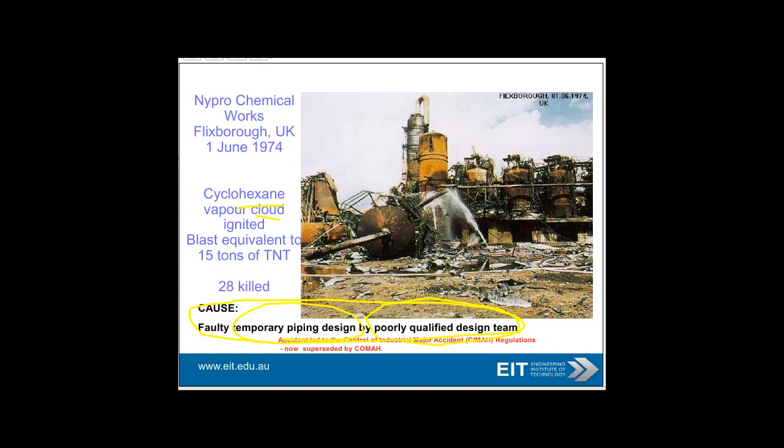But obviously, at the end of the day, it's up to the designers of the entire system to make sure that you don't get put into this position in the first place. So temporary piping design is a big issue. Having a control system to pick up the problem is really a little bit later after the event, so it's not a preferable scenario, but obviously it does give you that safety protection.

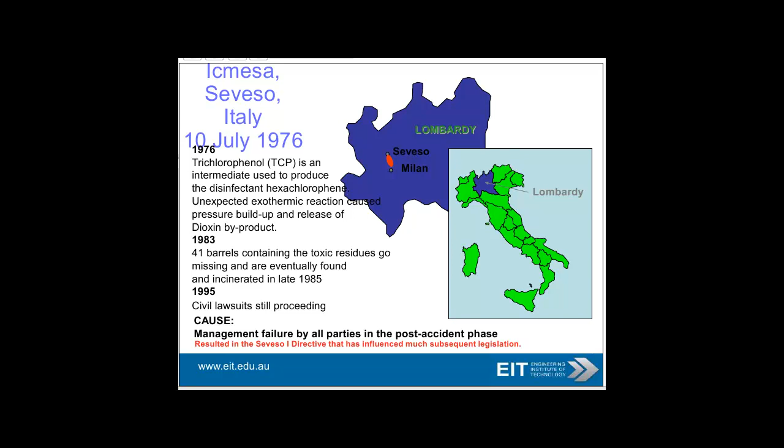Another example is ICMESA, Seveso, Italy, 1976. Again, TCP, disinfectant. Exothermic reaction caused pressure buildup and release of dioxin byproducts. Pretty horrendous problem there. So again, to be avoided, I think TCP is actually carcinogenic.

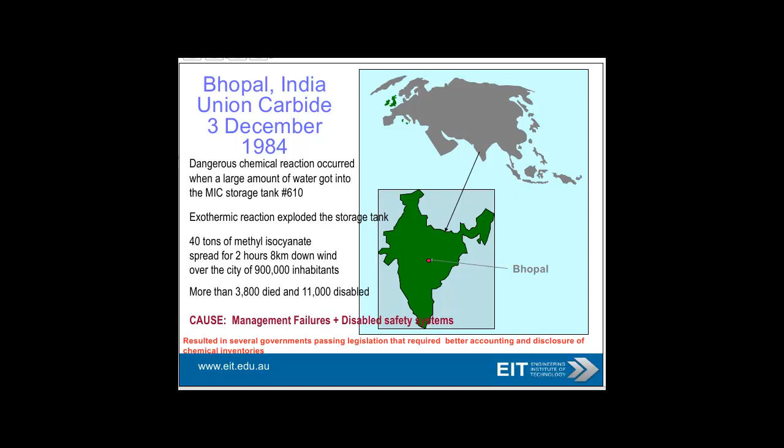Another example is Bhopal, which is pretty horrendous, 4,000 died. A large amount of water got into a storage tank, causing an exothermic reaction that exploded the storage tank. So basically you had methyl isocyanate released into a very poor town of 900,000 inhabitants. Absolutely horrendous situation. I reckon the CEO of Union Carbide was so traumatized, he was a very successful individual, but after this he basically semi-retired. Not that it helped the 4,000 that were killed in India.

Milford Haven, UK, Texaco refinery. Funny enough, soon after we ran a course there actually. Horrendous alarm overloads, and again, a pretty bad explosion.

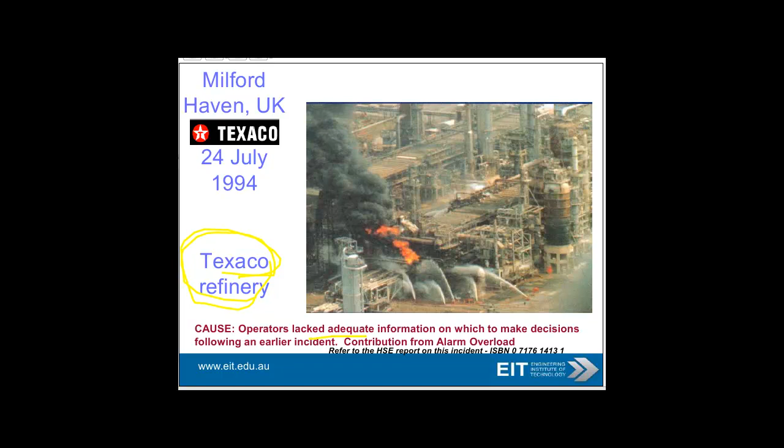Sonat Exploration Company. No plant operating procedures, inadequate vessel relief devices, and absence of any process hazard analysis. So overpressurization, 4 killed.

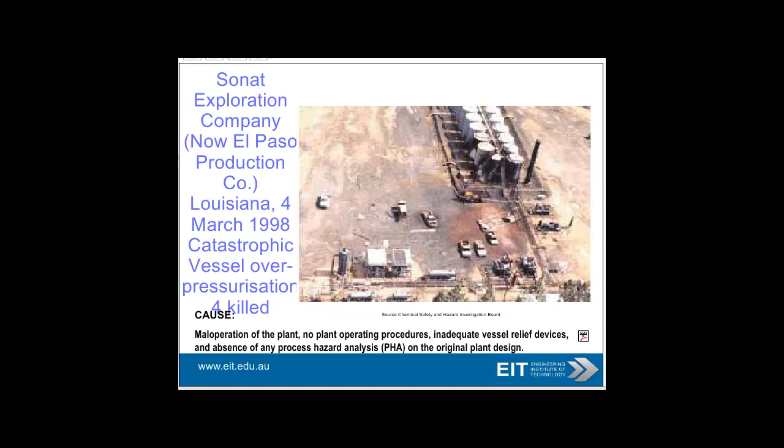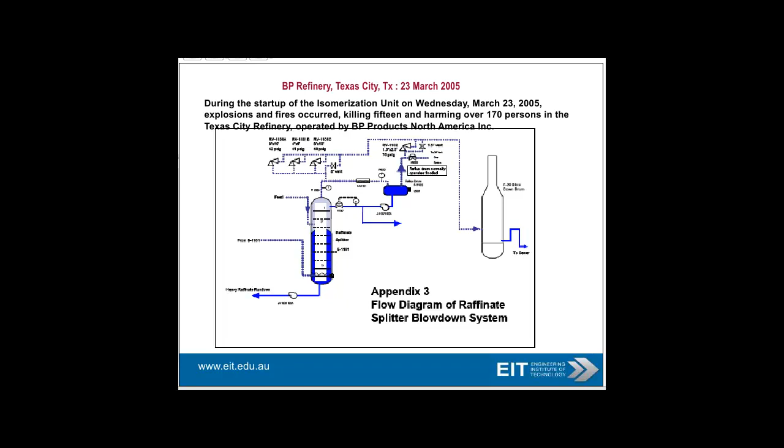Another one is BP Refinery, another famous one, 23rd of March 2005. Again, pretty bad explosion there. And obviously the question is, can it happen to us? Well, it certainly can if we're not going to do something about it.

So just here are a few basics of the system, whether it's an emergency shutdown system or safety instrumented system, whatever you want to call it. First of all, we use the abbreviation SIS, Safety Instrumented System, often referred to as a shutdown system, instrumented protection system. Everyone has their own little acronyms, as we all do.

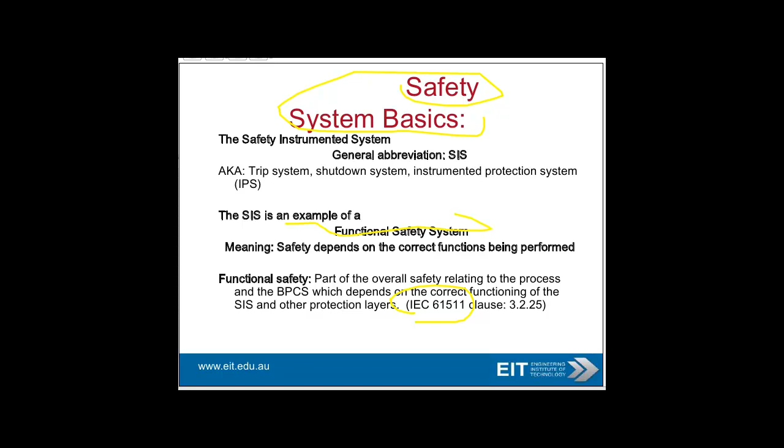And this is an example of a functional safety system. Again, I emphasize this fixes or tries to prevent damage or hazard after the event. Obviously, the entire holistic design needs to be done properly from the beginning. So this is related to the 61511 standard and the 61508 standard.

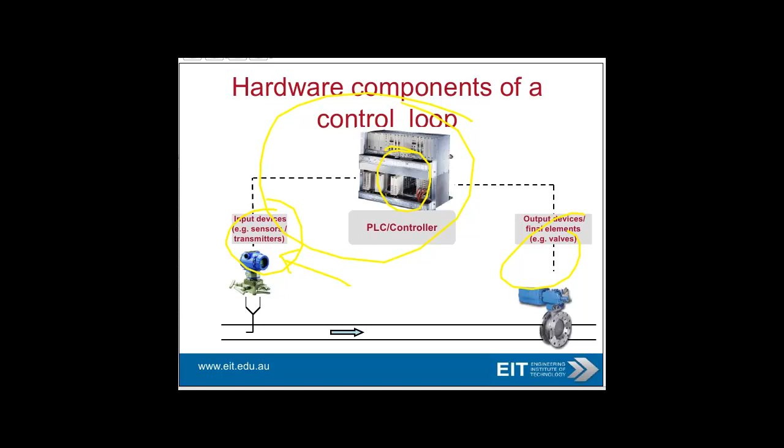So really in a typical control loop, which we're all familiar with, you've got a PID control loop. On your left, you've got the good old flow meter, and on the right, you've got your control valve. And in the middle, you've got your PLC controller, DCS system, or standalone loop controller.

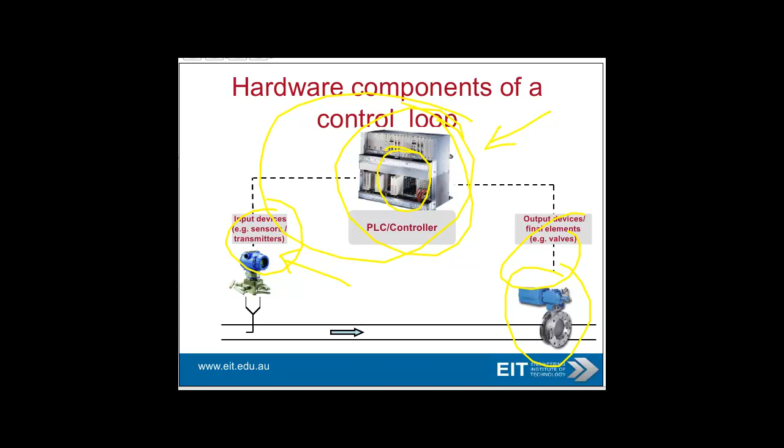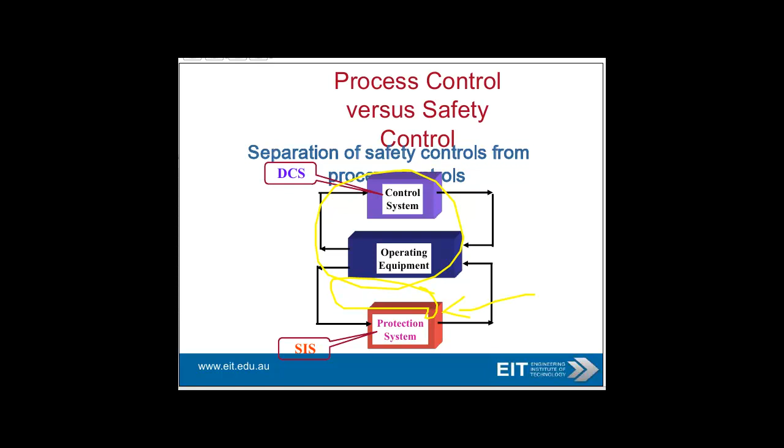As you would see from this, there's nothing really to pick up a potential hazard. Obviously you're designing this so you don't have a hazard, an overflow or over level of the tank. So the idea is you put in a protection system running in parallel, which picks up the potential problems and corrects for any problems independently of your control system. The control system will also act properly, but this acts as a sort of big brother pickup of problems.

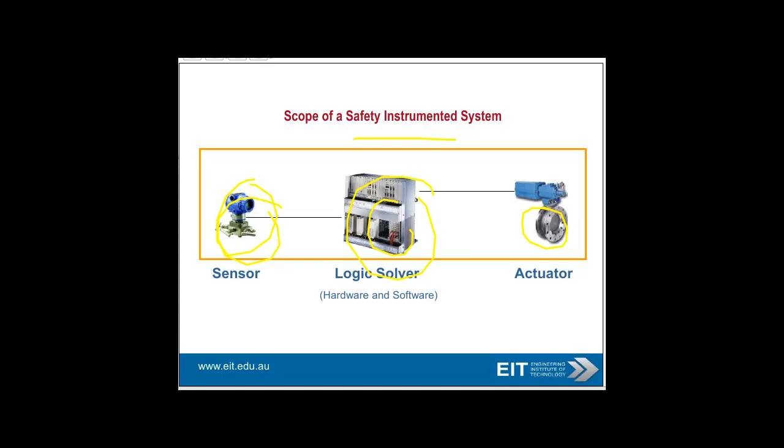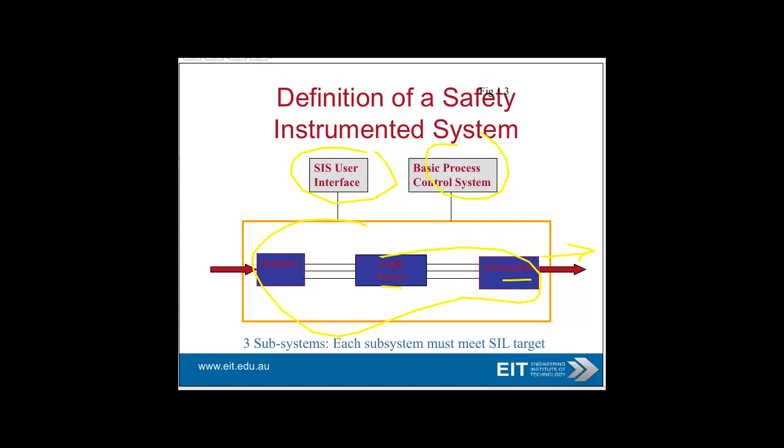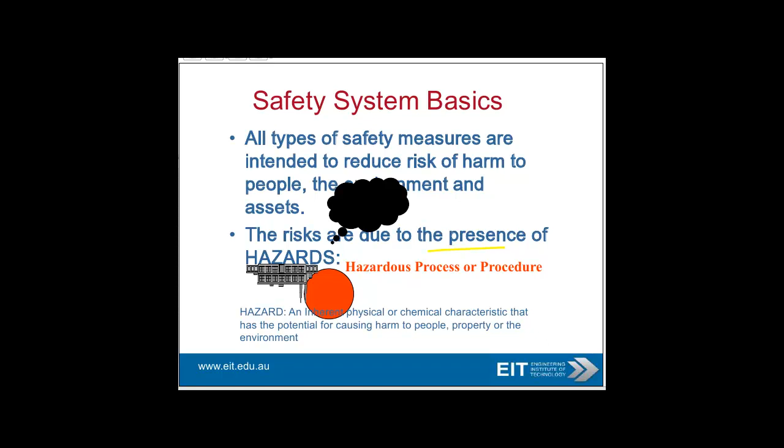Just a few issues on the system basics. Obviously the risks are due to the presence of a hazardous process or procedure. And a hazard is defined as an inherent physical or chemical characteristic as a potential for causing harm to people, property, or the environment. So that's what we've got to assess.

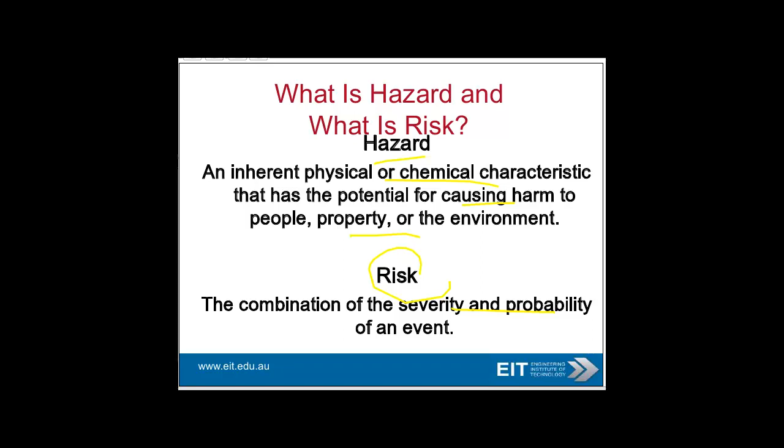So a hazard really is what is the potential problem, and then there's an issue called risk. When you have the severity, which is how bad is it, and the probability or frequency of the event, multiply those together, you get a risk. So obviously we want to try and keep that as low as possible.

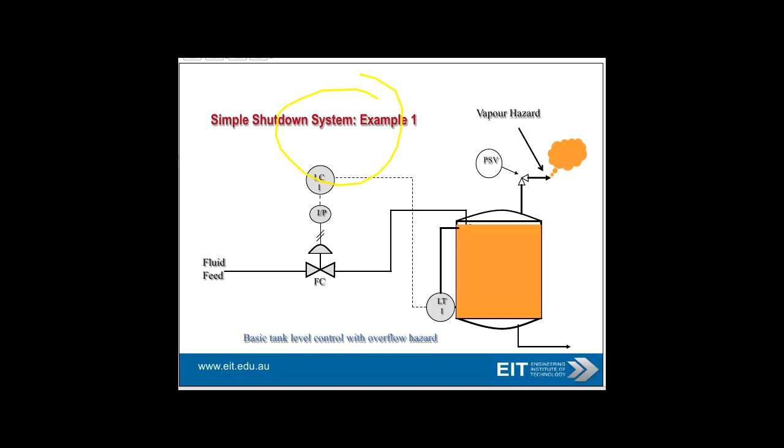So here's a simple shutdown system. Don't worry too much about that. Vapor hazard. Obviously we want to avoid overflow with this system. Shutdown system.

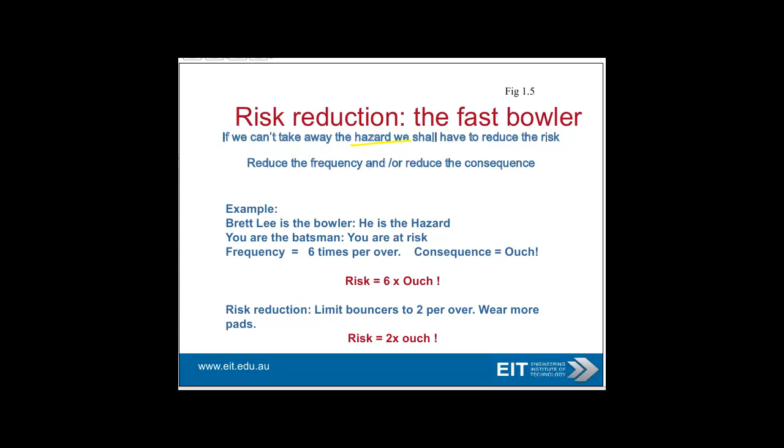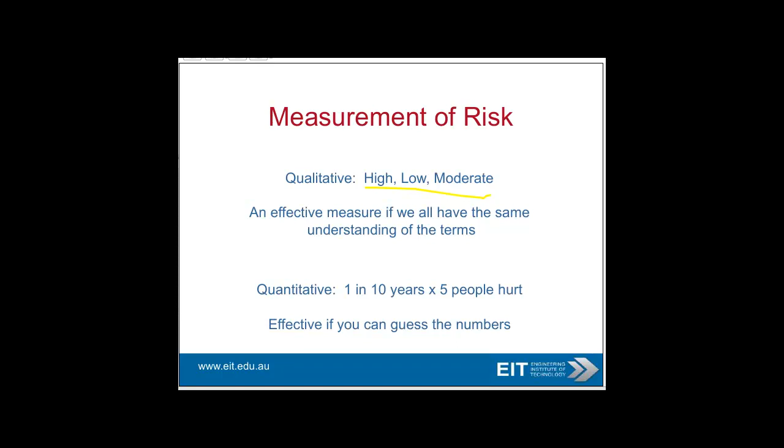So risk reduction is reduce the frequency and reduce the consequence if you can. That's assuming you can't remove the hazard. So a typical example is you can have risk which is high, low, or moderate. For example, quantitative: 1 in 10 years, 5 people get hurt.

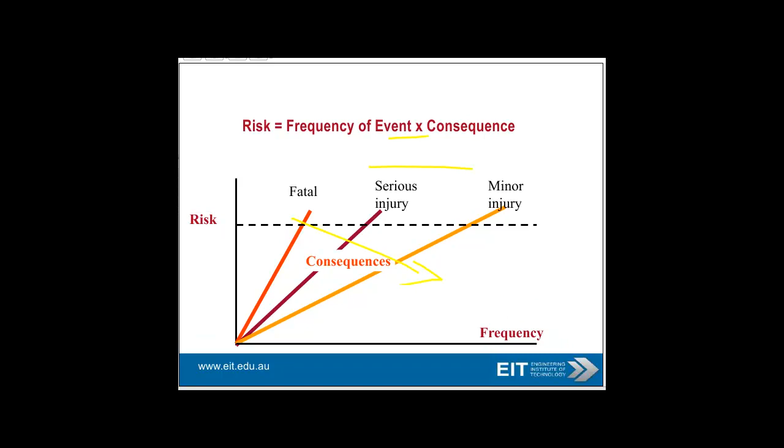So here's the example of the risk, which, as I said, is the consequence multiplied by the frequency. So you could have fatal, serious injury, minor injury. Obviously the idea is to try and reduce the risk as much as possible, reduce the consequences and the frequency, and try and make sure that it happens very rarely.

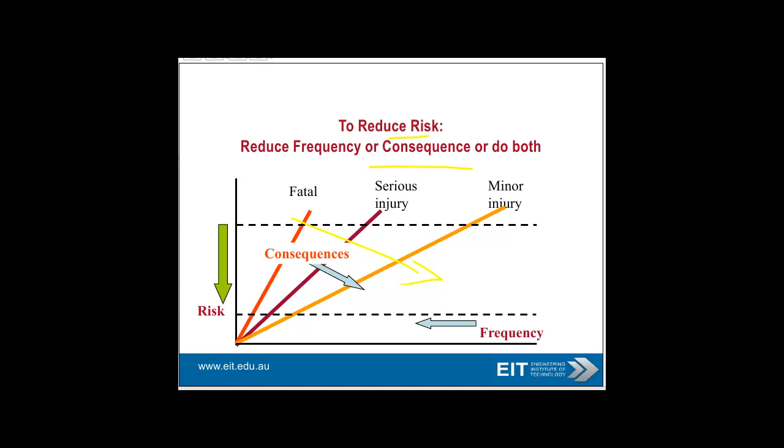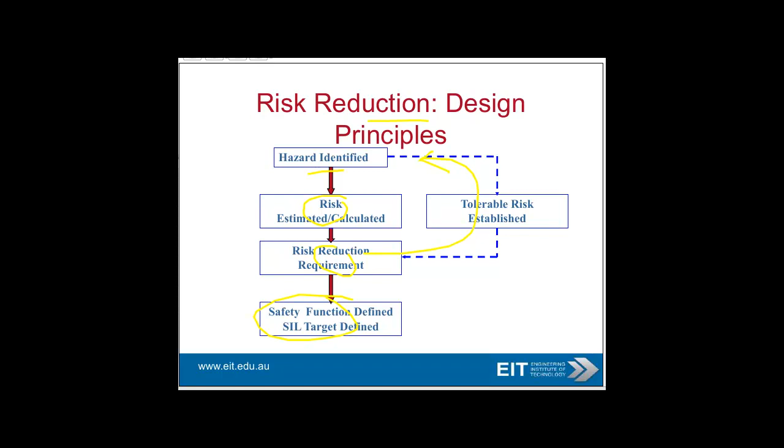So if you can't change the hazard, you can actually look at reducing the risk of it happening, the actual probability. So risk reduction design principles, as we indicate in the diagram: identify the hazard, look at the risk reduction requirement, RRR, and then establish a tolerable risk, and then you target your safety instrument at that.

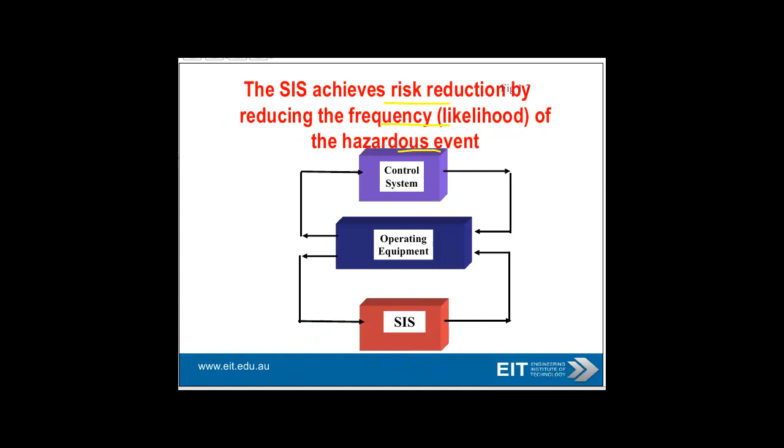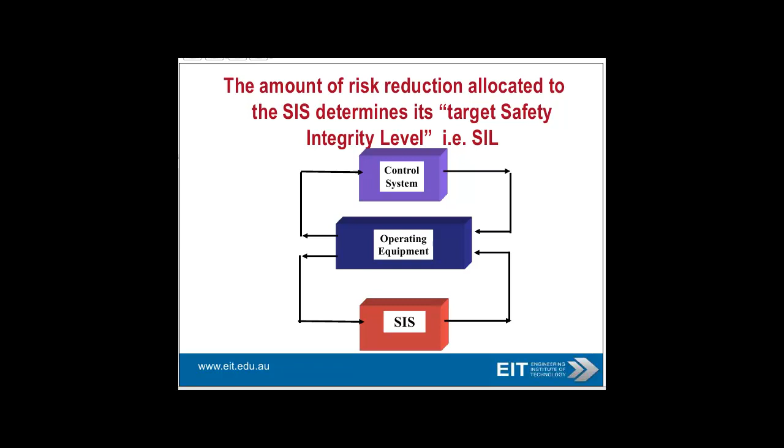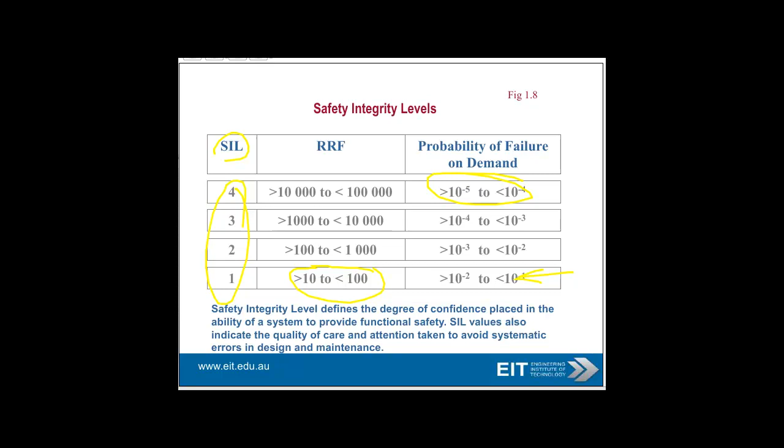So basically, the risk reduction factor for level 1 SIL is greater than 10, less than 100. We'll give an example of that in a tick, all the way to 4, which is 10,000 to 100,000. So probability of failure is very, very low. So safety integrity level gives you the level of confidence placed in the ability of the system to provide functional safety.

So what does SIL mean intuitively? For example, you have a SIL of 1. You have a safety instrumented system with availability of 90%. You say that's acceptable, high level trip in a liquid tank. In other words, there's a 10% chance of failure. 1 out of every 10 times the high level is reached, there would be a failure, which means you overflow 1 out of every 10 times you're in that position.

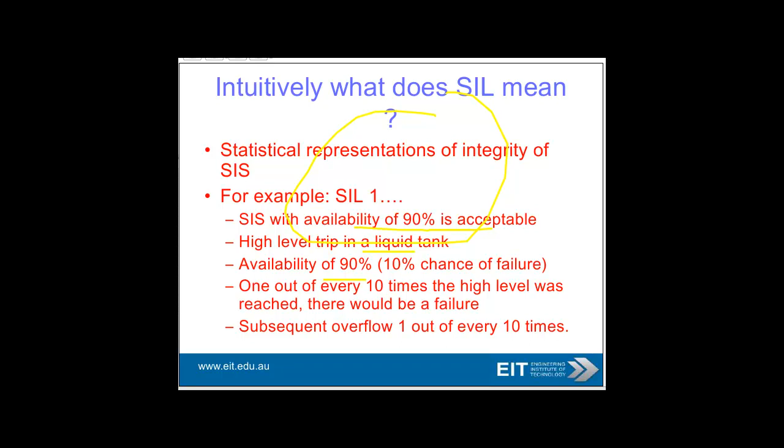So that's a SIL of 1, 10 to 100. Pretty low. And obviously, if you're dealing with something pretty bad, you will find SIL of 1 is completely unacceptable.